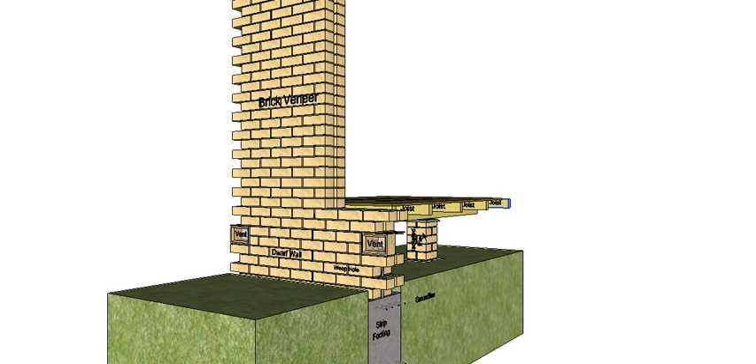Let me just scroll out. Footings are in place, we've started our double brick wall, put our engaged and isolated piers in, our bearers and joists, our timber floor is down, and we've just got this double brick wall in place.

So you'll notice two skins of brickwork going up. Over an opening we have to use what we call an arch bar.

Now because this opening is only a doorway, you don't need a very big arch bar, so flat bar will suffice. However, the wider or longer the opening, the bigger arch bar you're going to need, and quite often you'll actually have to use a piece of angle, and the flange, or the adjacent flange on the angle, goes up into the cavity, up into here.

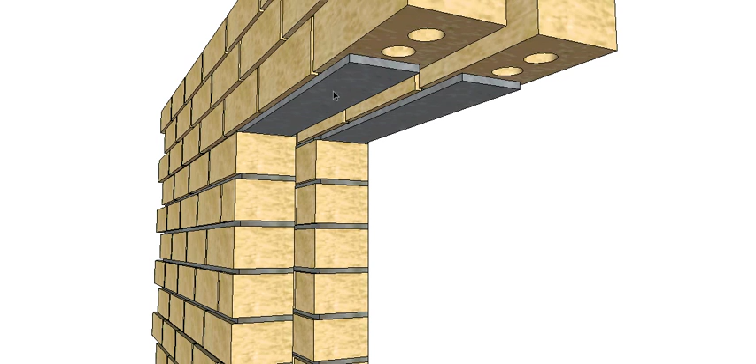So they're arch bars holding the bricks over the cavity. You'll notice that the Morse ties I mentioned in the previous video continue up the brickwork every fourth course, to within at least two courses of the top, or no closer than two courses of the top. That just holds all the brickwork together, ties the two walls together.

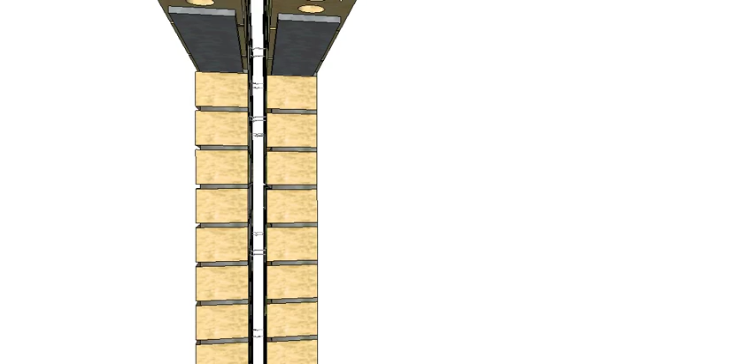You'll also notice that the walls are different heights. This is our outside wall, it finishes lower because it's going to have the eave go across the top of it. This is the wall that will become load bearing, so it goes up to the full height.

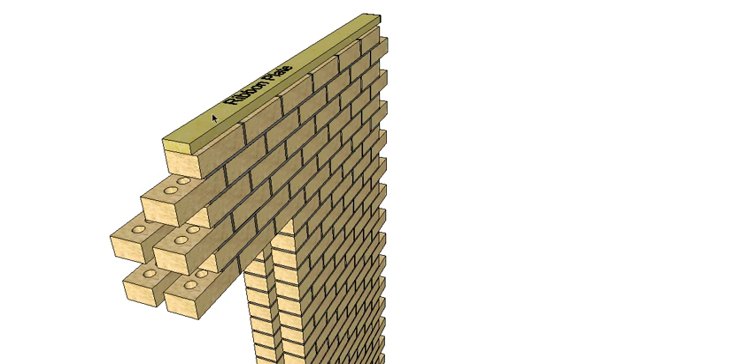On top of this wall we put a timber plate, similar to our ribbon plate in our other videos, and that's where we're going to pitch. It's also referred to as a pitching plate, where we're going to pitch our trusses or our rafters off.

And it is tied in with builder's strap. The builder's strap is embedded into the mortar at least four courses down and pulled up, then nailed onto the ribbon plate to hold it in place.

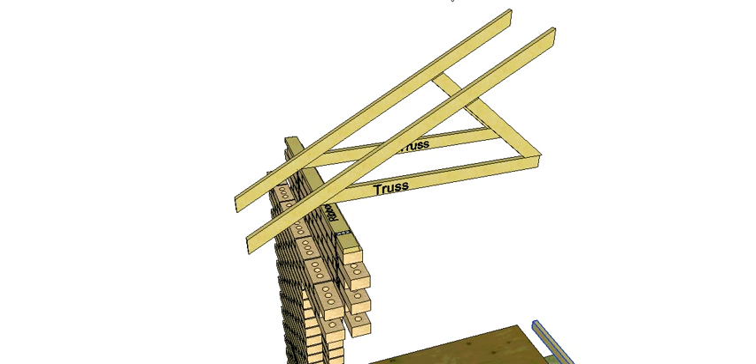Then of course our trusses or our rafters are put in place. We put our roof on, and then the construction is fairly normal to what we've had before. Our fascia, if we do our soffit and our soffit sheet, and of course our quad mould to cover up that gap.

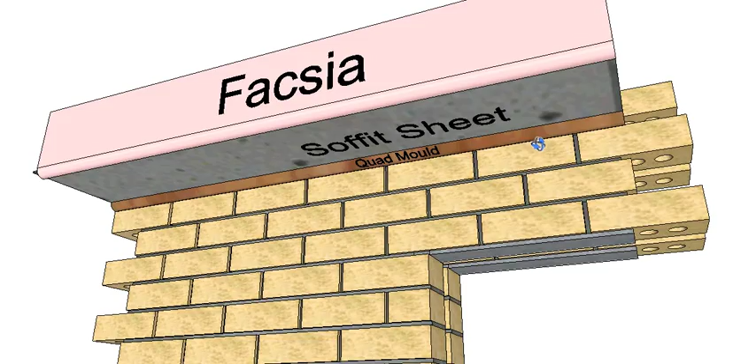So you can see here this only just makes it, but we have a gap there so that if any movement occurs - not that you get much in a brick building - you get a little bit of movement there.

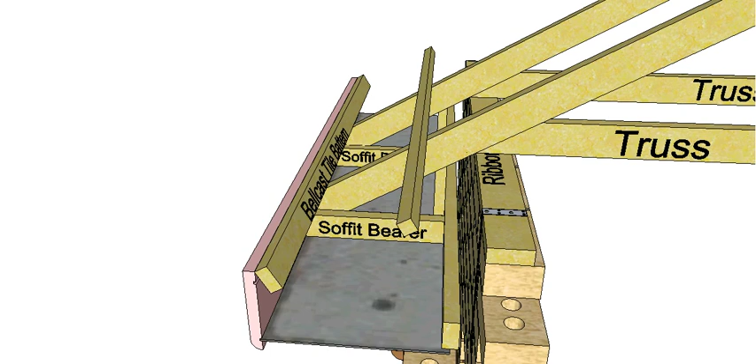Of course then we need our bellcast batten, our first tile batten, so we can put in our anti-ponding board, our sarking or sisalation, depending on what you prefer to call it, our tile battens, and then our roof tiles can go in.

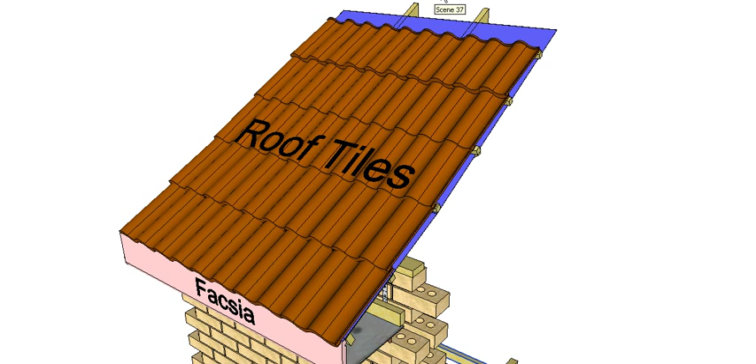So there we go, we're getting through the process. In the next video I'll show you how we'll finish off the doorway and tidy up the inside of the building.